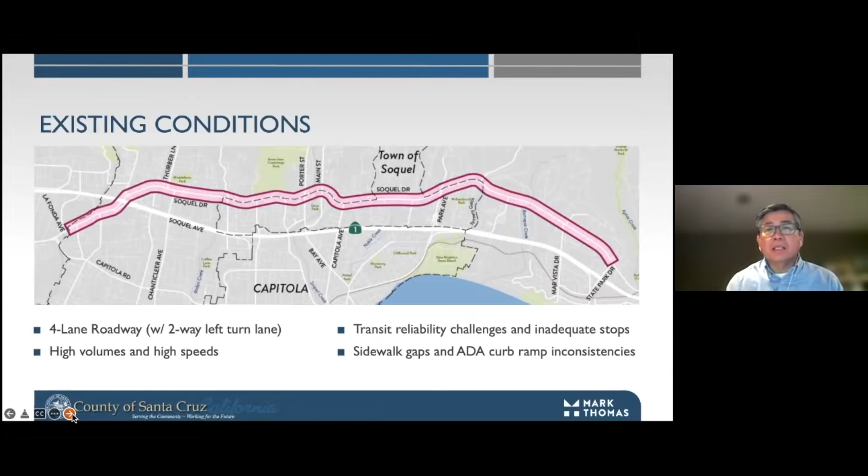The project is on Soquel Avenue and Soquel Drive, and it goes from La Fonda to State Park Drive, about 5.6 miles in one direction. It's a 4-lane roadway with center turn lanes. We have high volumes—when Highway 1 is congested, traffic spills onto Soquel Drive. We also have high speeds despite 35-mile-per-hour speed limits, transit delays due to congestion, and existing sidewalk gaps and ADA ramps that were built to previous standards. Those are the general existing conditions of Soquel Avenue, Soquel Drive.

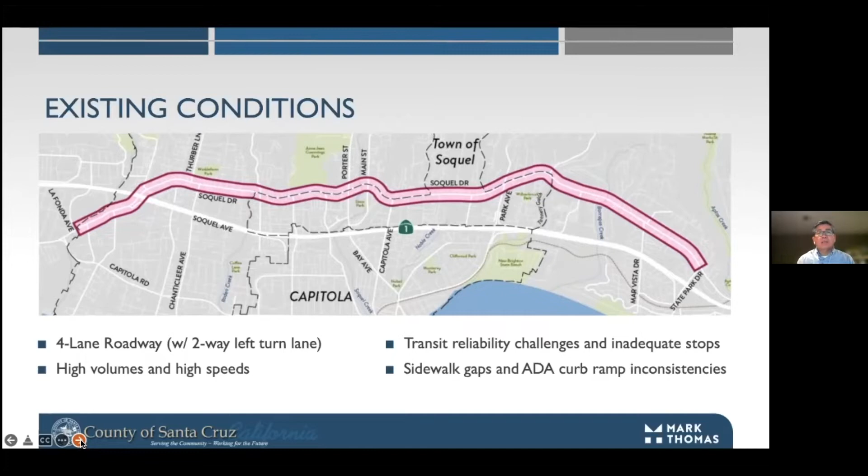Now I'm going to go into the project goals. Our number one goal is safety, and one of the safety goals is bike safety. As Manu had mentioned, Santa Cruz County ranks near the top for California counties for the highest number of bike crashes—something we're not proud of, but we think this project will help.

We also want to reduce traffic congestion, which will increase corridor throughput, reduce greenhouse gas emissions, improve emergency response times, and improve access to housing, jobs, schools, and medical facilities. Our other goals are to improve active transportation connectivity and promote sustainable development.

I'm going to go over the project budget. I'll give you a little background. As Supervisor Koenig mentioned, this project is part of the Watsonville to Santa Cruz Multimodal Corridor Program that came out of the Santa Cruz County Regional Transportation Commission's Unified Corridor Investment Study. The study identified multimodal transportation projects on Highway 1, on Soquel Avenue, Soquel Drive, and Freedom, and also on the Santa Cruz Branch Rail Line. The projects identified in this study provide the greatest benefit to the community. The RTC did extensive community outreach in developing this study.

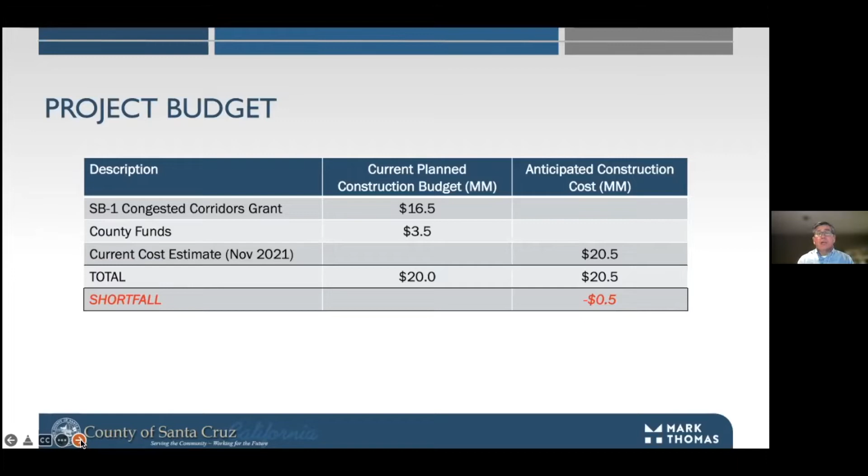I'd like to turn it over to Sean O'Keefe, who will go over the project overview. Thank you.

Great, thanks, Russell. So one thing before we jump into the overview and some of the project elements is I wanted everyone to understand that we're not widening Soquel Drive as a part of this project. Really, this is reimagining what we can do within the existing curbs and the space that we have out there today. We'll be adding some additional sidewalks and curb and gutter to close some gaps, but otherwise in general we really are working within the existing conditions that we have out there in the field.

So you can see here, as Russell mentioned, the project goes from La Fonda all the way over to State Park, and we've identified the signal locations where we're going to be upgrading, as well as what facilities we'll be able to implement from a bicycle perspective. We're also now adding additional mid-block crossings and RRFBs throughout the corridor.

Some of the project features: we'll be adding 5 miles of separated bikeways, class 4. If you look in the upper right-hand corner of this slide, you'll see what a class 4 cycle track looks like—a buffer between the traveled lanes and the bike lanes with a vertical separation, in this case a class 1 delineator, very similar to the treatments we'll be putting on Soquel Drive. We'll also be able to add 5 miles of buffered bike lanes—class 2 lanes without a vertical separation, and also a wider stripe in some locations to provide separation between the vehicles and the cyclists.

We'll also be implementing 27 new bike boxes. You can see in the lower right-hand corner a 2-stage bike box, where cyclists, instead of traversing across the high-speed and congested travel lanes to make a left-hand turn to a cross street, go with the flow of traffic across the intersection, stop, wait for the cross street's light to turn green, and then continue on the cross street. We have an animation we can share if folks are interested.

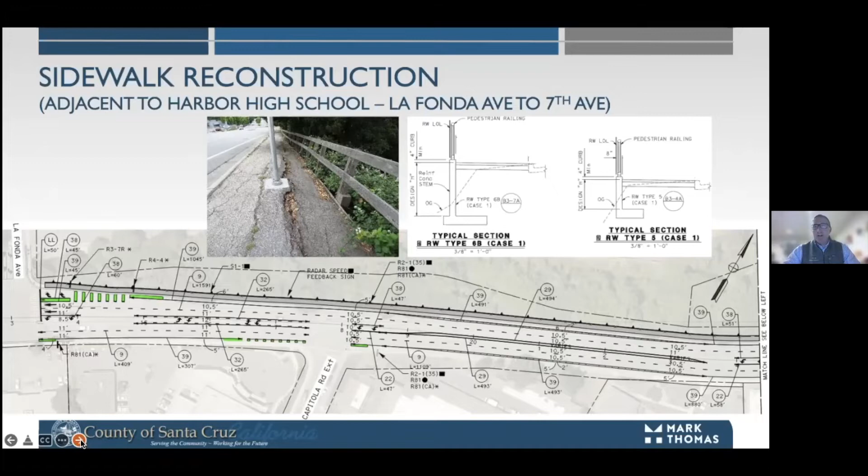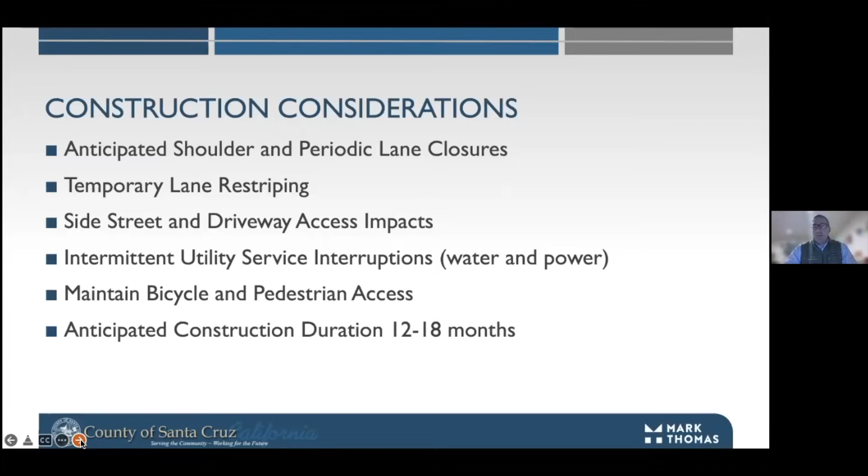We will be maintaining bicycle and pedestrian access. With lots of curb ramps being reconstructed, as well as some shoulder closures, we'll maintain access across the corridor. Looking at construction, we hope it's on the shorter side towards 12 months, but just to be safe we're saying 12 to 18 months, in case of construction complications and/or weather delays due to rain or otherwise. We anticipate it should take no longer than 18 months for project construction.

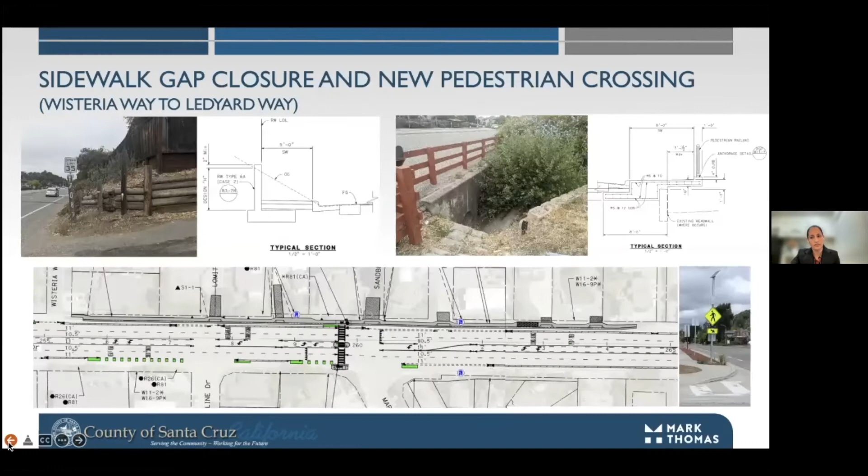Kayla, if we can go back to the screen, someone wants us to go back over the Soquel Village changes, which they say is a huge bottleneck at this time. Sean, if you want to walk through some of the improvements here again.

Sure. Essentially through this stretch, as Russell mentioned, we're not really changing the lane configurations we have out there today. It's squeezing as much as we can out of the lanes to enhance the bike lanes through this stretch. Unfortunately, we will not be able to provide any class 4 or buffered bike lanes in this area because we are so constrained through the village area.

Will the buffered bike lane continue from Chanticleer Avenue through Soquel Village with the elimination of on-street parking? We're currently not eliminating parking through this stretch. Dan, correct me if I'm wrong, but the only parking along the corridor that we're eliminating is on Cabrillo, correct? Yeah.

We got another question. Was a right turn only lane from Soquel to 41st looked at? This project, we weren't doing any major street widening, so that right-hand turn lane is not going in under this project, but it has been looked at as part of a development project earlier.

The next question was, how is the fire district's concern about the narrower lanes for the 9-foot wide trucks being addressed? We have had discussions with the fire district and provided them a set of plans, which they're reviewing right now. For the most part, the lanes in Soquel Village have not been reduced. I believe the only area is the 11-foot lane in the eastbound direction has been reduced down to 10.5, a half a foot in one direction. There's still 11 foot in the number 1 lane going eastbound.

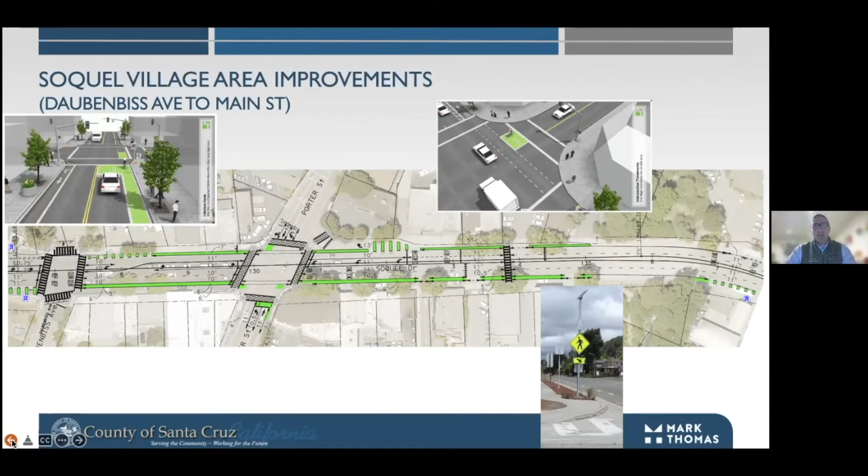Yeah, so the intent for the buffered bike lane is to put as much of it as we possibly can and use logical terminal points. If we could put buffered and vertical separation class 4 cycle tracks everywhere we would, but we can only put those in certain locations. So that was our number one goal, to put as much protected bike lane as possible. But as we ran out of space, we went down to a class 2 buffered bike lane, and in some cases we have just a class 2 bike lane with a thicker stripe. Hopefully that answers the question enough. I don't know, Dan, if you had anything to add there. No, I don't.

Will the Robertson Street 3-way stop sign be converted to traffic lights? Not as part of this project. It'll be a future project that'll convert that to a signalized intersection.

There was a question on why there is no continuous sidewalk through this corridor. So there's a portion there that would require some massive retaining walls that were beyond the scope of this project. That's why there's no sidewalks planned for that area at this time, due to the cost of installing those sidewalks with the retaining walls.

Did you consider using leading pedestrian intervals to reduce car versus pedestrian conflicts? Can you answer that one, Sean, please? Yeah, Dan, do we have LPIs on this? I'm trying to recall if that was a part of the plan. I'm not actually aware that we do. I do not think we have LPIs currently in our plans. No.

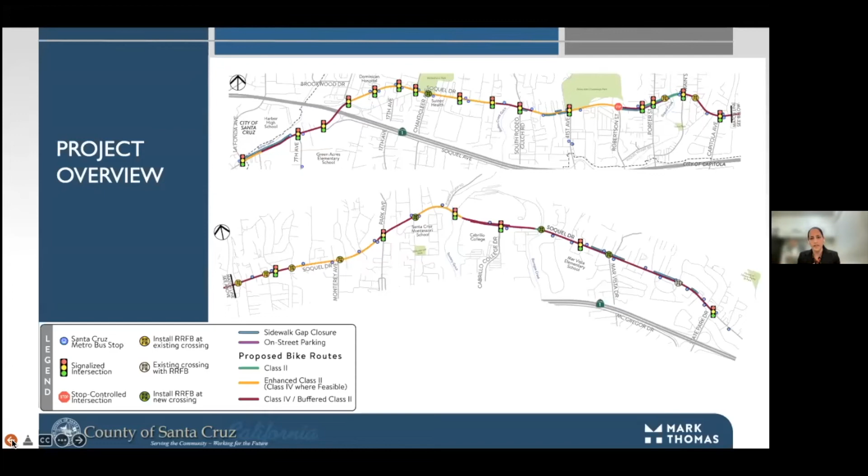Will there be slides available after the meeting? Yes, this entire presentation and meeting summary, as well as the appendix which will be all of these slides, will be posted to our project website, which I'll put in the chat here within the next about 2 weeks.

There's a message from Danny: there's going to most likely be one lane of traffic between Robertson and Daubenbiss on Soquel for a 6-month period, do we think? It's a good question, it's hard to say honestly. That's definitely something that should not be a 6-month delay. Again, most of the work done as part of the sidewalk gap closure projects will be done on the shoulder, so we won't be reducing the throughput of Soquel Drive itself. There will always be 4 lanes, or generally always 4 lanes open to the traveling public. There'll be some restriping, some temporary restriping, but most of the work is relegated to the shoulders.

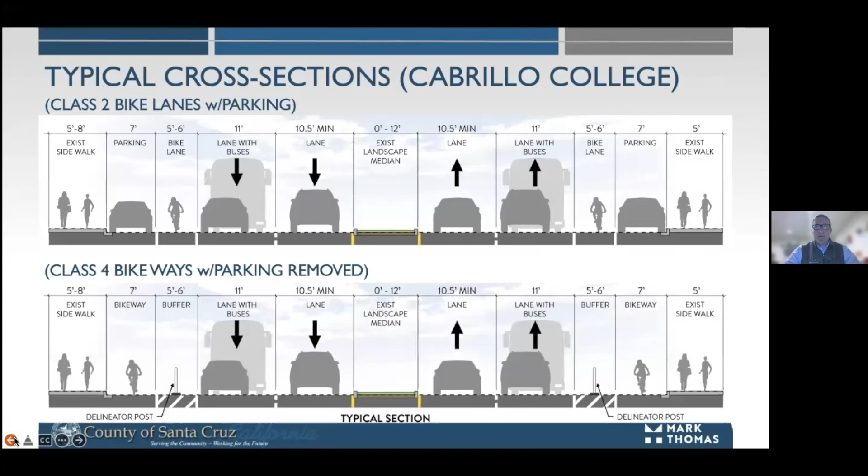Sure, let's go back to that. You're almost there, Kayla. Keep going, keep going. Go one more—there you go.

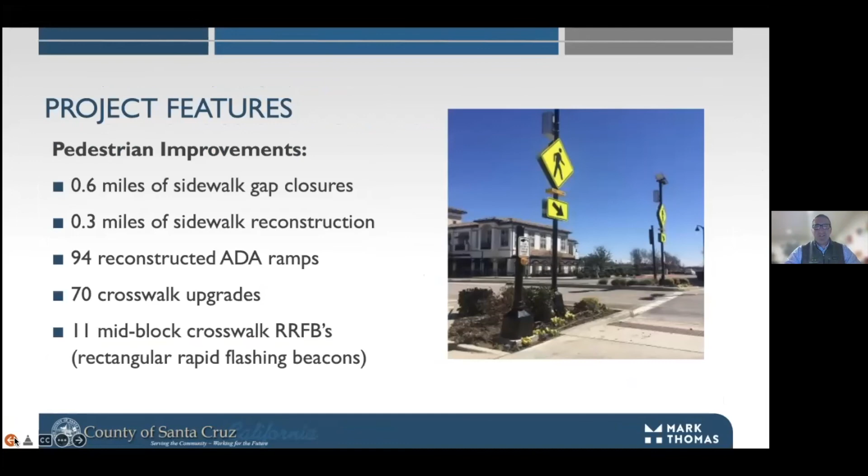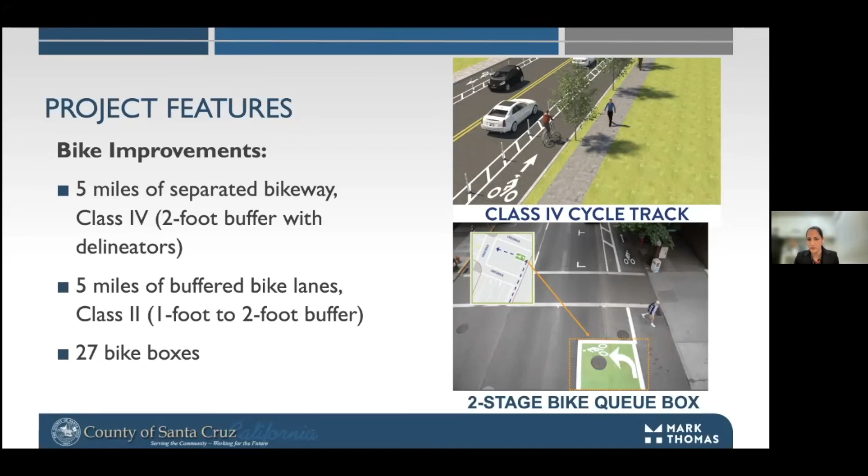All right, it looks like our final question is: can we share the detailed plan image for the whole plan? Yes, we will definitely look into our website images and make sure we are sharing this presentation as clearly as possible.